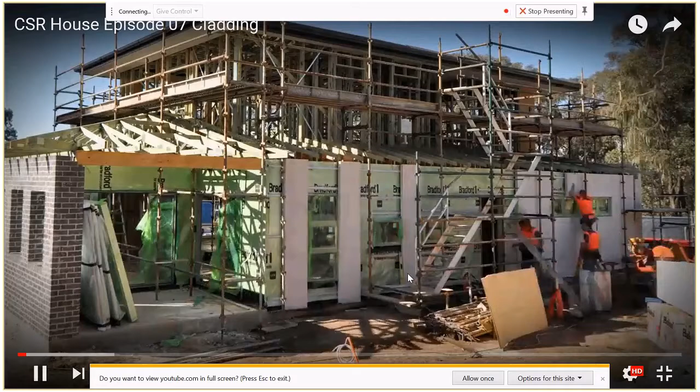One of the aims of the CSR House is to create a sustainable, energy-efficient home that's still going to look modern and attractive. The external cladding is a large part of a house's personality, so it needs to have that contemporary look, but perform thermally as well. We're using a composite of cladding materials to create that distinctive exterior style.

With so many options to choose from, you can go for face brick, rendered masonry walls, fibrous cement panels, weatherboards, or even stone. How do you choose the best material for the location and function of a wall? And why go for a composite look anyway? Here's Gareth to tell us why.

The reason we chose composite materials for the outside of the building was, one, because we wanted to display a variety of the CSR products, but also so that we could experiment with the thermal performance of each of them in various situations on the building.

With the cladding options, CSR has a very wide range of products that can be used for external cladding on houses. Upstairs, we chose the Cemintel Designer Series, and for the cladding on the downstairs area, we chose the Hebel PowerWall. We're aiming for an 8-star energy rating, so it's important to choose products that are high achievers in the efficiency stakes, but also have excellent environmental credentials.

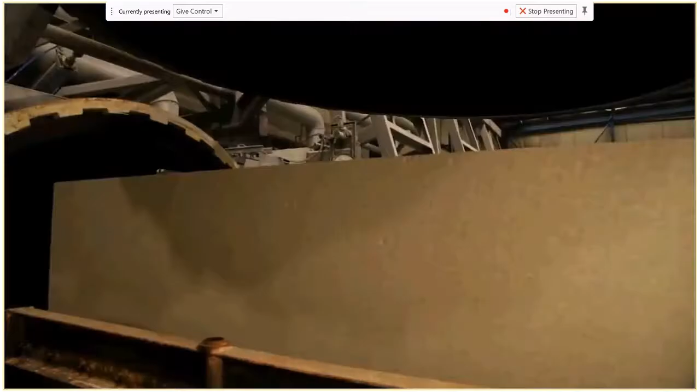Hebel is autoclaved aerated concrete, manufactured from sand, cement, lime, gypsum and aerating agents. Each Hebel PowerPanel is reinforced with specially coated steel mesh, making it incredibly strong and durable. Then it's cut to shape in various lengths and profiles and steam pressure cured in an autoclave. Hebel provides an attractive modern exterior with all the energy performance we need.

Hebel's a fantastic wall cladding system. This is Hebel PowerPanel. These come in 600 wide panels in varying lengths from 2.4 up to 3 metres. They're a 75mm autoclaved concrete. It's very easy to store on site. It comes in a palletised modular form. There's less wastage on site because you can accurately determine how much product you need.

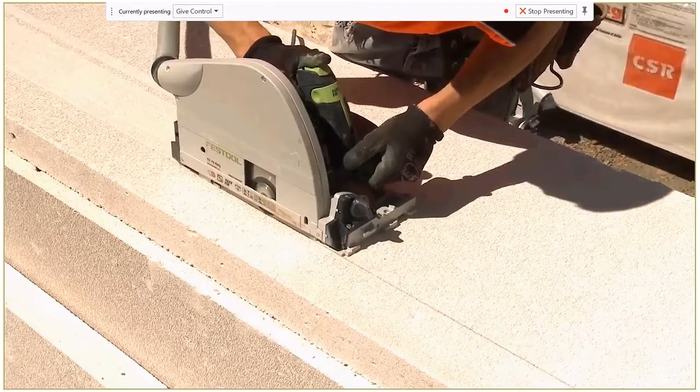You can use conventional power tools, so a circular saw with a power tip blade. Carpenters generally install the product, so it eliminates the need for other trades on site. What we do is spend a bit of effort to make sure that the frame is true and plumb, and then we use a top hat section that we run horizontally across the frame. In our case, we use a 25mm top hat section, but it can go up to a 40mm.

So everybody see that packing out, that top hat as well, so things aren't perfectly plumb, so it's not the best case scenario. A bit more adjustment between the panels.

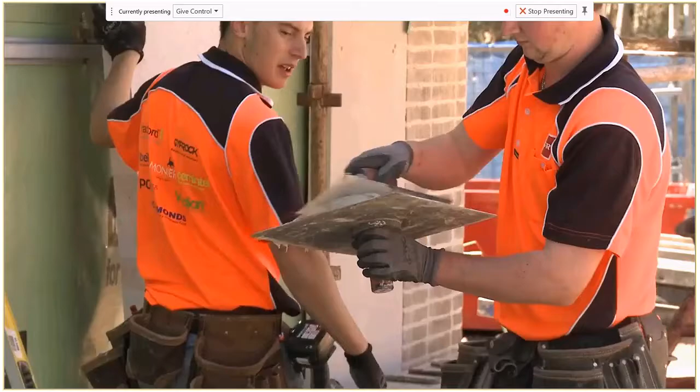The panels are then screw fixed into place, and a proprietary adhesive is applied to the joints, and they're butt jointed together. That adhesive is then scraped off before it dries, and then an acrylic-based render is applied over the top. The render produces a fantastic monolithic rendered finish to the panels, and I've really enjoyed working with it. It's been a great product.

Hebel is non-combustible and it has very high fire resistance properties. It can achieve up to an FRL of 240 minutes, and what that means is it's also a perfect solution for building in bushfire-prone areas. Hebel complies with all 6 bushfire attack level requirements across the country. The Hebel PowerWall has a much better thermal performance than other masonry cladding options.

So everybody understands the bushfire attack levels? So, yeah.

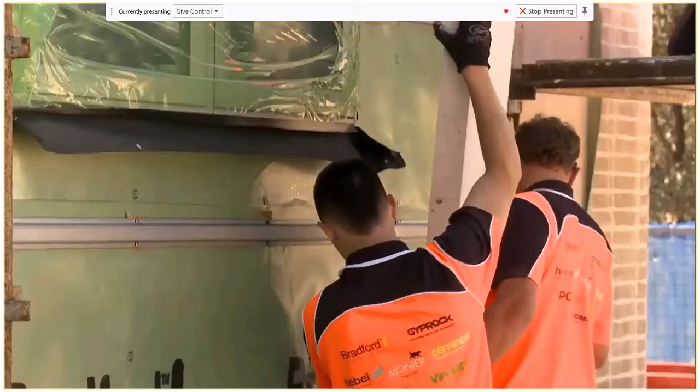You get 0.3 to 0.5 boosts of your R value over equivalent wall systems. It has 61% less embodied energy than concrete and 64% less embodied energy than brick veneer. Hebel is a quarter of the weight of traditional masonry, and our steel reinforced PowerPanels actually pass that critical knock test.

What our consumer research has shown us is that many homeowners these days are highly driven and motivated by design, and that's what attracts them to Hebel, because it allows them to achieve that design freedom and flexibility in their home.

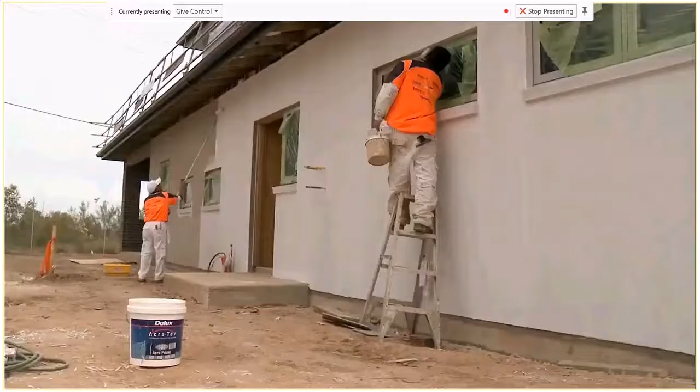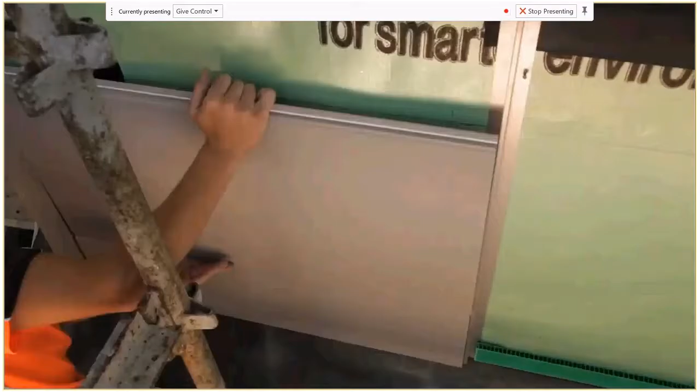Hebel gives a great finish on the lower level, but on the upper level we needed a product that was going to complement the solid contemporary look of Hebel, but be lightweight and durable. Cemintel Designer Series is installed as a complete finished wall system. The panels are tongue and groove profiled along the top and bottom, so they fit neatly together to form a waterproof joint. It also features a ventilated and drained cavity, which is a proven and highly effective method of waterproofing buildings.

The Cemintel Designer Series is a pre-finished walling system that looks great, is quick and easy to install, and has all the reliability you'd expect from a CSR system.

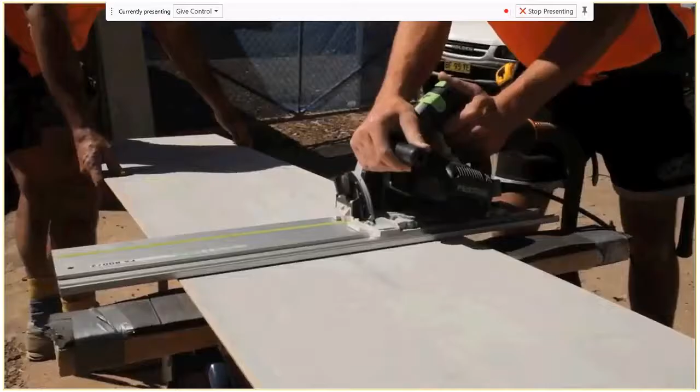The product's actually made of a cement composite material, which is actually lighter and easier to work with than standard cellulose fibre cement. Although it's lighter than standard fibre cement, it has the same properties, so it's termite resistant and won't rot. The Designer Series comes in a range of textures and colours, which makes it great for standalone design or in combination with a number of different facade materials, such as a composite construction, which is the CSR house.

No finishing is required, so essentially all the products have a multi-layer coating, which is designed for long-lasting colour performance. The coating also has an inbuilt property which prevents dust and dirt adhering to the panels, which means that maintenance simply consists of spraying down the wall with a simple garden hose. The Cemintel Designer Series fixing system is totally unique.

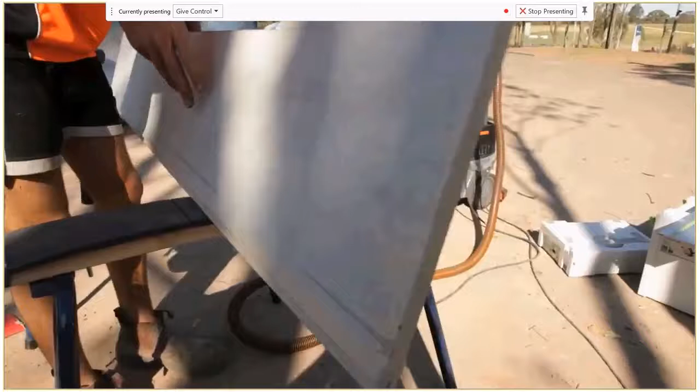Preparation is key to affordability and a successful Designer Series install. Carpenters can do the whole installation from framing and then cladding the wall itself. The boards come in 3030 millimetres in length and 455 is the effective cover. The installation of the board is very easy to achieve. There's a starter strip fixed in the bottom of the frame. You level that off and then the boards are held in place with that.

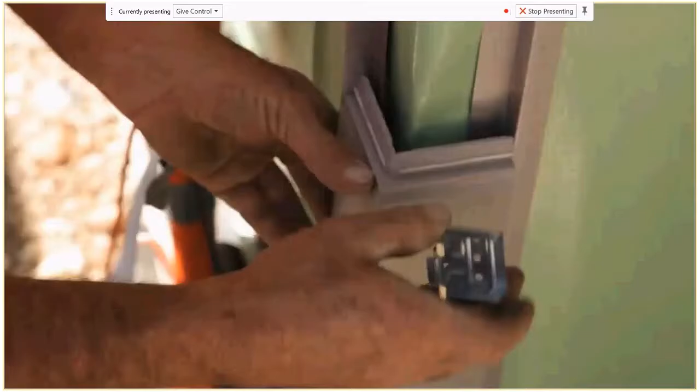The boards have preformed corner pieces which go in and then a sealant joint applied between them or in between boards. And as you can see, that sealant joint works very well. It's very hard to distinguish between that and the board itself. Rather than conventional cladding systems that are fixed direct to the studs, this has got a 15mm cavity which allows for ventilation of the wall system.

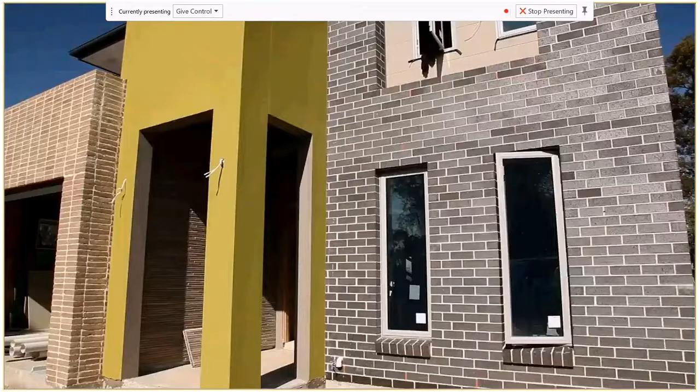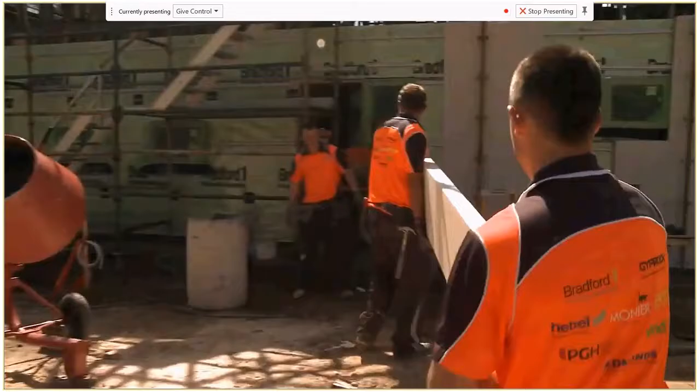Where we're using the Cemintel products, the new display panels, they're being used as feature panels in the lower levels, and it's a very, very attractive finish, looking like a stack stone finish. There is a huge advantage in using the integrated products on a building site. One, because you've got one manufacturer delivering the product, so it's simple. Two, because you've got trades who understand the product and put it together quickly. I mean, the Hebel product we do exclusively on most of our buildings now because we find that the product is so simple and quick to erect.

Can they use that for a wet area directly? You can, but typically, if you're going to do a timber joist system like that with PowerPanel flooring, then you use something like a thick sheet, like the really heavy fibre cement sheets. Has everybody seen those? There's a few different product names for them, and put that down. That gives you a decent sort of step down. If you've got a 75mm panel, then you've got like a 20mm thick sheet going down, so that's a 55mm set down for your bathroom. You can put a screed over top of that and have your drain to your floor trap. So yes, definitely you can use it for wet areas, but there's that benefit of using thick sheet for your wet areas and bringing your joists close together in that wet area.

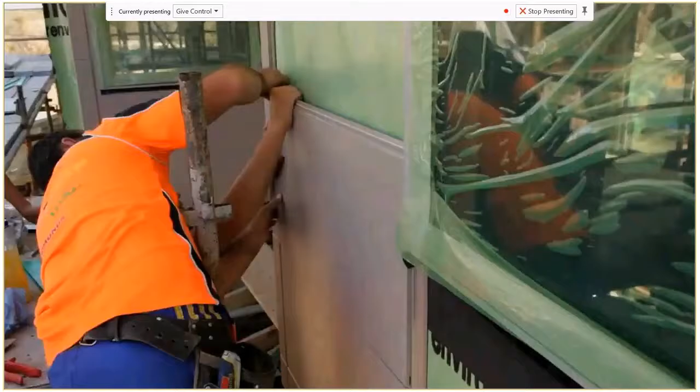On the floor, glue it and squish it together and screw fix it off. And the same thing with the wall panels. When you come to the Cemintel product, it's the same scenario. Again, you're using carpenters to do the work. It's a quick and efficient way of putting a building together, and you get immediate effects. Really, the advantages you get are the guarantees that we provide, because we've done the testing on the connection systems and the jointing systems. So you really do have much more comfort and peace of mind that you're not going to get cracking in the wall elements.

In designing with both Hebel and Cemintel products, from an architectural perspective, we get to expose the sculpture of the building much more. You can already see how the textures are working together, and the advantage of using all CSR products is they integrate perfectly.

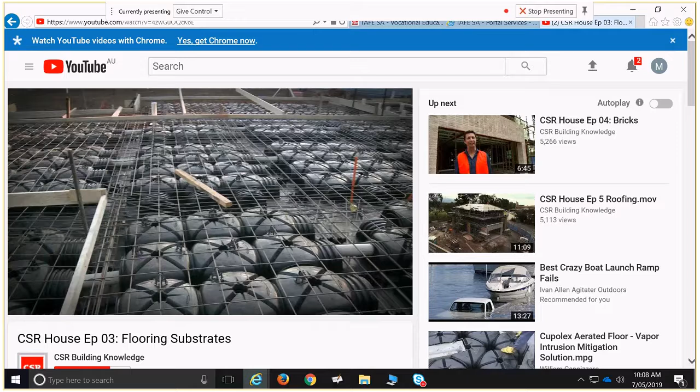The concrete slab that we've used in the CSR house is a variation on the traditional waffle pod slab. Traditional waffle pod slabs use polystyrene void formers. We're using a system called the Cupolex dome system. Cupolex domes are made from recycled plastic, and they're forming the domes or the voids underneath the concrete slab by basically forming volumes and pockets of air rather than being a full solid polystyrene block. Polystyrene is quite nasty on the environment, and the recycled plastic PET that goes into the Cupolex domes is obviously a recycled product, so we have much less impact on the environment.

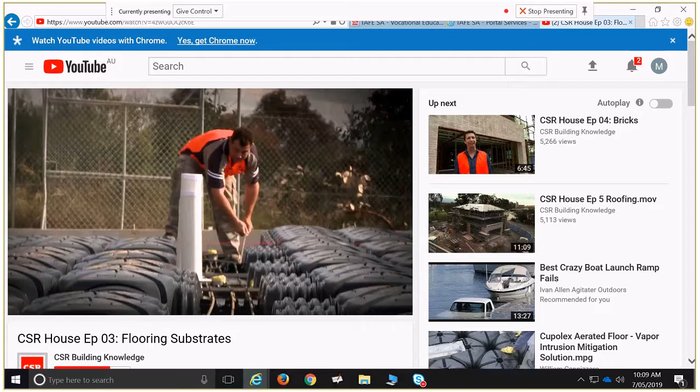We can have a lot of flexibility in how we interlink the domes, whereas the waffle pod systems are purely void formers, and in accordance with the relevant codes, they should only be placed in single units with a concrete beam in between them. With these systems, we can do quite large areas, all interlinked with domes, which we call dome clusters, and we find that's a benefit in costs and speed of construction and ease of construction as well.

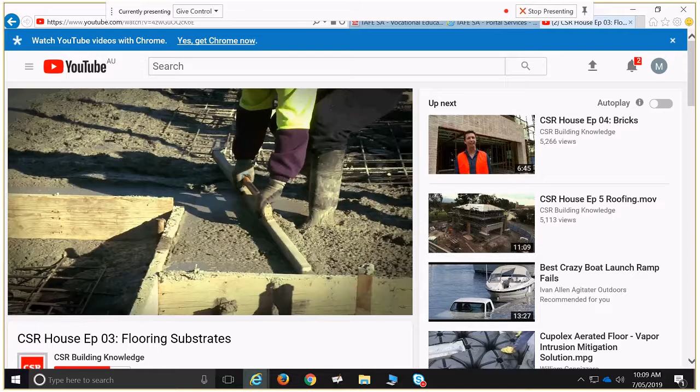The arching effect on the edges of the domes, and also inside the middle of the dome there's the cone shape, which gives them a lot of strength as well. The benefit of that is that every corner of the Cupolex dome bears onto the ground and gives it inherent strength, and it's like a composite plastic concrete structure which you can't get in other forms of construction for slabs.

So with the Cupolex dome system, basically the entire Cupolex pods were delivered on 2 pallets, whereas most traditional waffle pods using polystyrene need 1.5 trailer loads effectively of polystyrene. So you have less transport requirements, less waste on site, and less mess when you're doing the preliminary works for the concrete.

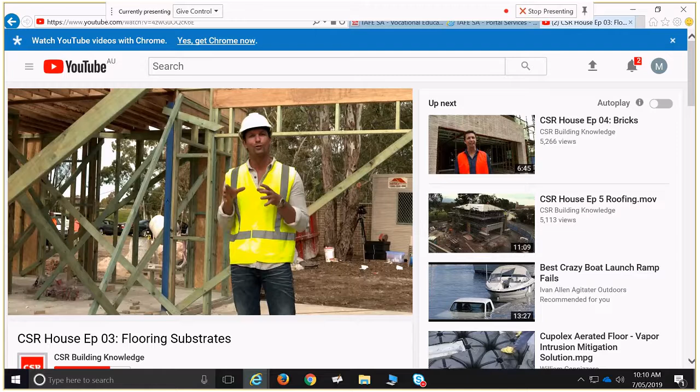For this project, concrete's a great choice. It's durable but quicker, easier and cheaper than a timber frame floor, and has many more thermal benefits. Where timber's a good choice for our sustainable home is in the timber frame. Timber's a renewable resource and has a much lower impact in its production than steel, making it better for your budget and the environment. It's thermally more efficient than steel, so it's going to save you money on your energy bills also. It's no coincidence 90% of residential construction is timber framed.

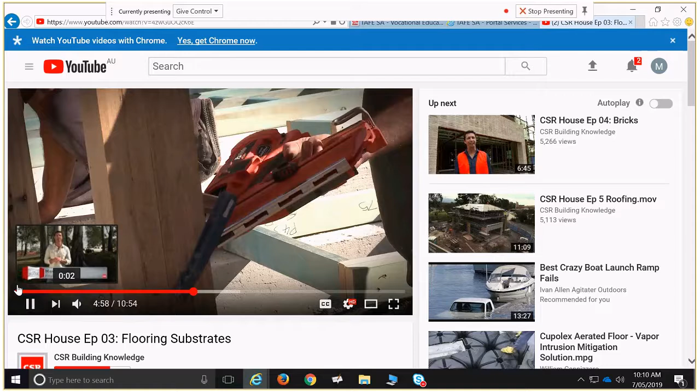Let's stop at that, because that's probably a lot of revision for everybody, and it's not too pertinent to what we're covering today. I just thought, because that Cupolex bit was coupled with this other Hebel video, I saw that the other night. But I'll show that in here as well, because it's another approach to a footing system, which is really innovative. So you have good solid slab on our ground floor, but if you want to keep costs down.

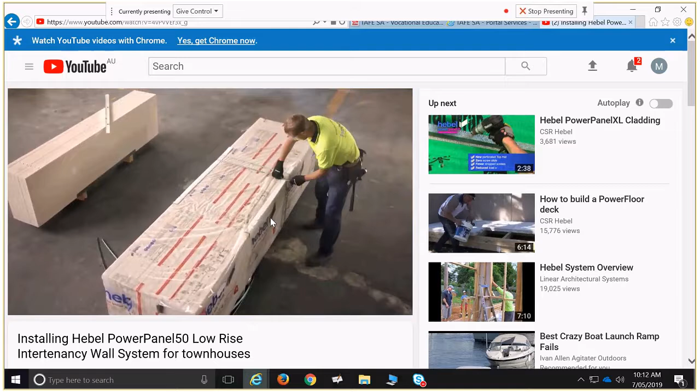We'll see this one as well, because this is about another application of the Hebel power panel. It's for intertenancy walls, because of its fire rating capabilities and its ability to be installed in a fashion which is independent of the support structure, and we'll see those details in a minute, makes it a really good intertenancy wall.

So in the first video, we see that they are making a steel mesh. By making the Hebel panel, they first created a big steel mesh, and then they filled it with the material, and then the slabs are very thin pieces, cut long and thin. So they have a little bit of that mesh in them. So does that mesh still work after cutting? Initially it was in the form of a net, and that's when it was giving strength, I think. And now the Hebel panels are cut in very small pieces.

Yeah. So what happens is all that mesh goes into the, I don't know what you call it, bath or form. So they've got a great big tub with all the Hebel cement slurry in there that's expanding up. All that mesh goes in there vertically. So it is cut vertically? Yeah, and then they pull out the big block and they cut them all vertically, like that. So the whole mesh is still inside it. But what you get happening on site, you get 3 metre long sections. You don't always want to use 3 metre long sections.

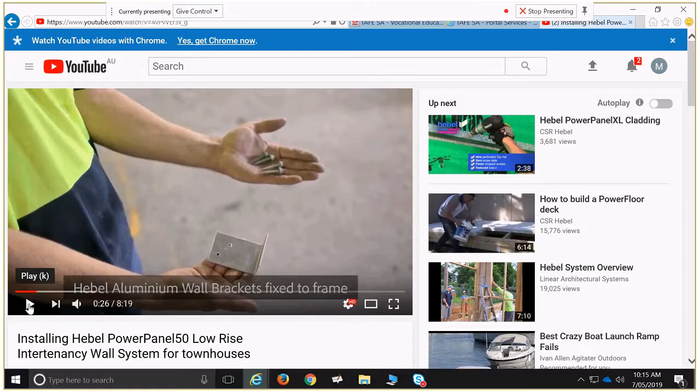Actually, I'll leave this one to roll, and I'll duck over to the storeroom and get a piece of Hebel. So while this is happening.

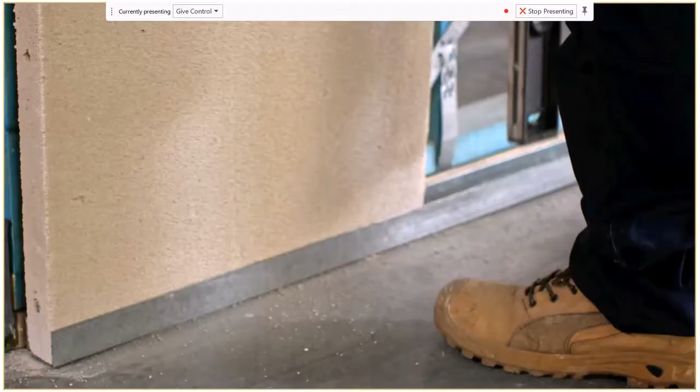They install this steel rail and they apply the gel kind of thing on the joint. Why do they do it just on the joint? It's that fire protection seal. Oh yes. So they'll have a joint between their Hebel panels, but to ensure... Not the panels, the rails. When they're going down, it's like a U channel at the bottom. They only put the sealant where they were butt joining together the U channel.

Okay, yeah. So that's because you get just a slight crack in there, and with the fire resistance levels that you see expressed in the National Construction Code, you've got structural adequacy, integrity, and insulation. That adequacy means that structure has to stand up for a given time. So it has to maintain itself as a structure.

The integrity means that no flames or gases can pass through that wall for that specified amount of time. Now flames, that's kind of easy to stop. Gases, it's not so easy to stop. You can have tiny little holes. When a building burns, you look at this building and think, okay, there'd be some pretty noxious gases coming off of this carpet and that polyfelt wall. You're not allowed to have any of those gases pass into another unit. So that means you've got to seal every single gap.

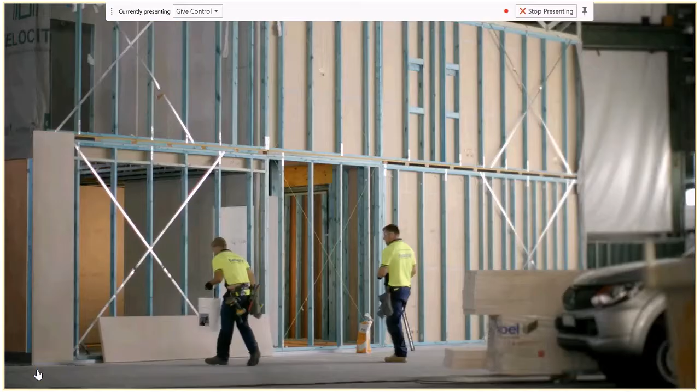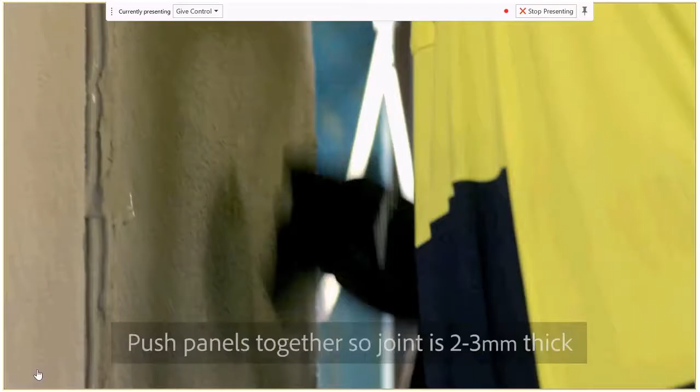That's one of the benefits that Hebel's got above things like blue board. Blue board is another substrate for render. With Hebel, because you've got thickness to the panel, you can have the adhesive on the end, and it means those panels end up working together, so when you've got movement in a frame, it's less likely to be expressed straight through those vertical joints.

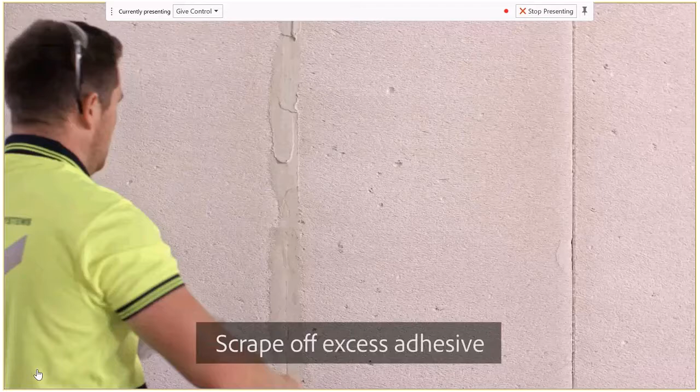So also with any solid type walling system, well actually even plasterboard, when you're doing really long runs, you need to have control joints in them. And you also have control joints throughout a building. Say for example you've got a building like this, where predominantly the structure is large steel portal frames. They're large frames of big sections bolted together. Those portal frames basically provide the shell for this whole building. They work independently of the floor slab here.

And so you'll notice around some of the portal frame stations, they'll have these diamond-shaped cuts, and those diamond-shaped cuts will line up with cuts in the floor slab. They're all control joints to enable those slabs to move a little bit, because everything in Adelaide does a little bit of this, with the reactive soils.

But if you've got a plasterboard wall, for example, or any form of wall going across that, and you've got a control joint in that floor, then you have to carry that control joint straight up vertically through every other element that's being built above. Because if you don't, and you do your plasterboard clad wall straight on top of that, it's going to crack directly above that control joint.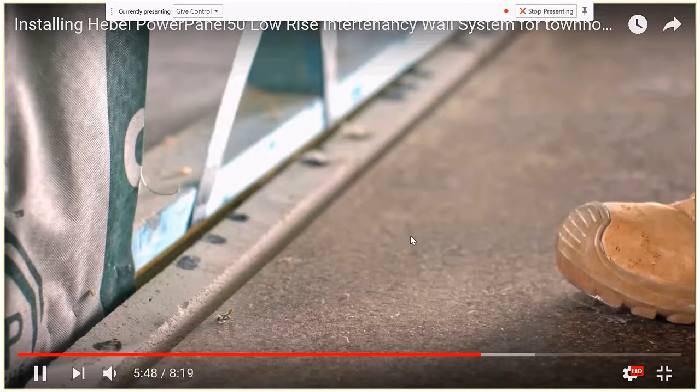Another thing that's used for sealing a lot of gaps for both bushfire prone areas and also in intertenancy walls is mineral fibre insulation as well. So it's one of those things which you can't burn, but it's compressible and will expand and spring back to help fill voids.

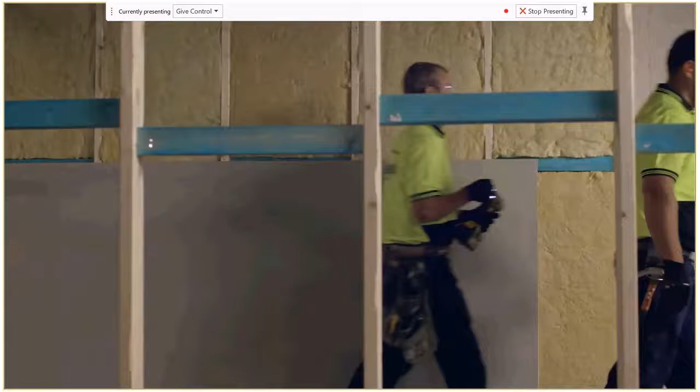So yeah, design installation guide, that's what we'll have a quick look at now. And also, two options for today's class. Yeah, it's still not raining yet. So we've got the option of we take a walk down to have a look at the buildings that are being built down here, where they're getting some Hebel in, and there's some other interesting stuff like with the OSB sheeting and so on for bracing that we could show you. So that's one option. Or the other option is we go through the services slides extensively.

If we don't go through services extensively today, we've made a bit of a mention of air conditioning, and it's about you guys looking at the stuff yourself this week and also researching air conditioning yourself, or vice versa. Or we go have a look at installation stuff. Do we have any preferences for one or the other? So I'll lump that decision on you. We can do a silent vote. I can pass around a piece of paper.

Well, we're not allowed to go into the site though. We'll just be standing. No. So just walk around the street. I don't know, I feel like the videos we've seen showed pretty detailed how it's installed, how it looks, and all that. Fair enough. Yeah. Cool. Do we have any detractors? And don't want to get caught in the rain out there. Yeah, it's meant to come in around 10 o'clock today, so 10:30. All right.

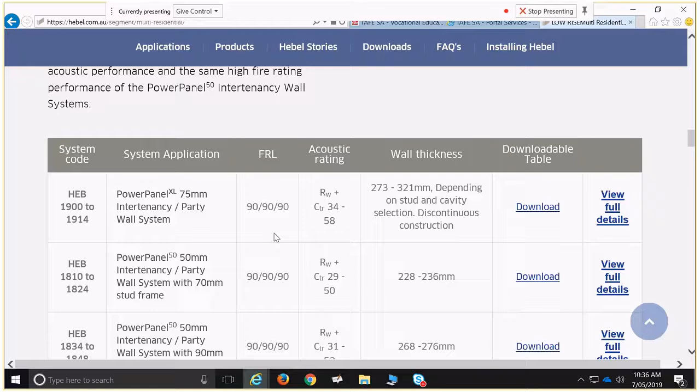One of the things you'll see in the design guides, I have to find out exactly where they are located again, but one of the things you'll see in them is you've got these system codes. So they've got a product, and they've got a whole bunch of other products, their top hat sections and all this sort of stuff. And they say, okay, with this system, you can achieve this particular thing. So let's say with HEB 1900 to 1914, you get a fire resistance level of 90/90/90. That's an hour and a half of adequacy, integrity, and insulation.

You'll get a sound transmission rating of between 34 and 58. For separate occupancy units in a class 3 building, you have to have a sound transmission rating of at least 50. So with one of those systems there, you've got to be able to use that in a class 3 building, and then information about wall thicknesses. So some downloads there for the various different systems, and I'll have to find these installation guides, maybe it's in products.

Okay, yeah, so design installation. So you've got all of your installation guides here for flooring, for walling, for all your multi-residential applications. We'll have a quick look at external walls, or intertenancy. Go to the next one, it's Hebel PowerFence. Okay, we'll have a look at this one then, that'll include some flooring. So low-rise, multi-residential and commercial 75mm PowerFloor. So all their panels, they call them PowerPanels.

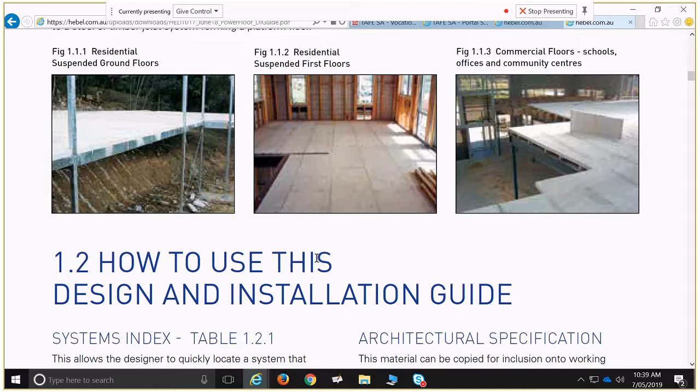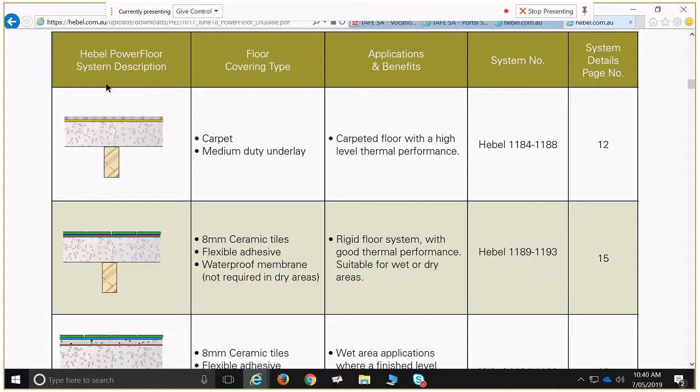So in here, you've got a bit more information about different installation systems. So we've got one for carpet, one for 8mm ceramic tiles, and then we've got these system numbers associated with them, and then page numbers for your details. So if we go to Hebel Power Floor System number 1184, go to page 12 for our details. Just like that. We go to page 4.

So there you have some installation details showing you've got floor joists running perpendicular to your joins in the panels. You run a bead of construction adhesive. Then you set down your first panel and screw fix it into place. Flush those screw fixings with the panel adhesive. Put some panel adhesive on the ends. Drop your next panel in. Squash that into the key joint, etc. And then underlay, carpet, etc.

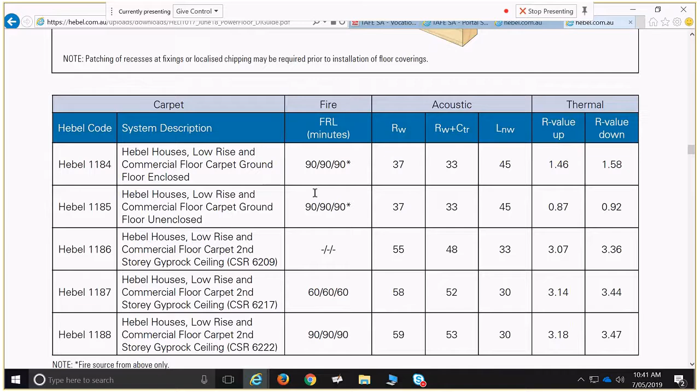And then in that range, there's your various different details and your sound ratings. So the first one that's going to meet those sound ratings for your Class 3 building is going to be that one. So we've got commercial floor carpet, second story gyprock ceiling. So you've got a gyprock ceiling underneath that.

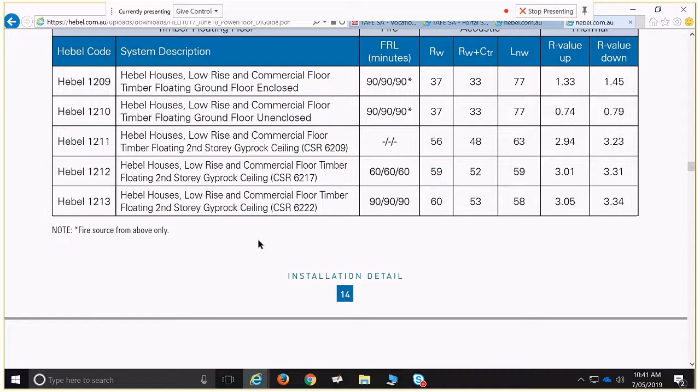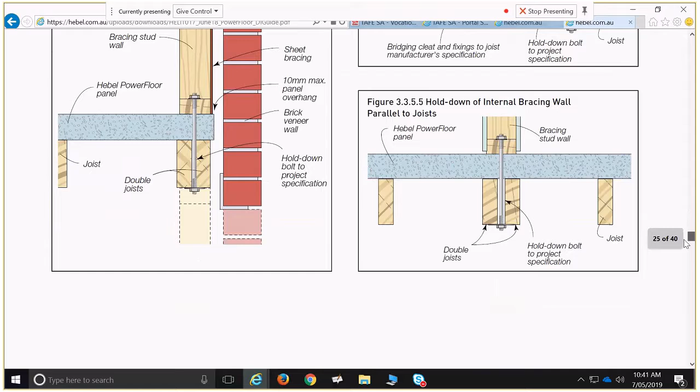Anyhow, work your way through these. Get to know your way around the design guides a bit, so you know that there are various different systems for various different uses and applications, and that all of those installation details for all the different approaches are there. So that's just flooring, but you've got walling systems, walling details, details for penetrations through flooring. Basically, pretty much every sort of detail you're typically going to require in the construction of a fairly straightforward multi-residential property, those details are in here somewhere. So have a good look through that.

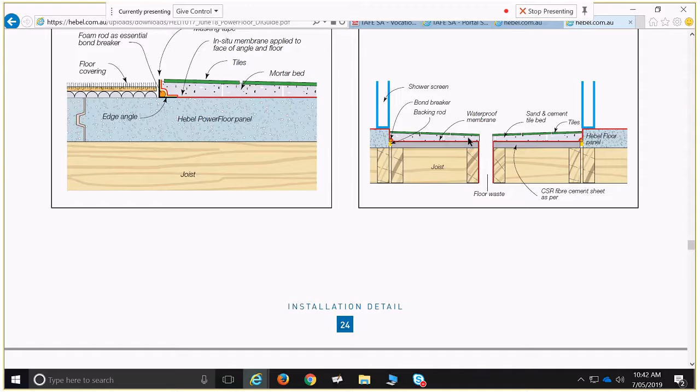Darcy asked early on, do you use it for wet areas? And I said typically you use a thin sheet. That's that detail there. So for the Hebel floor, you use a thin sheet that can create that set down, and then you put your screed on top of that. Because if it was like a chipboard, what do you call a floor like that? The framed structure floor. With a structure floor the frame actually has to be set down, but because Hebel is so thick, they're using a thinner material for the wet area. It doesn't actually.

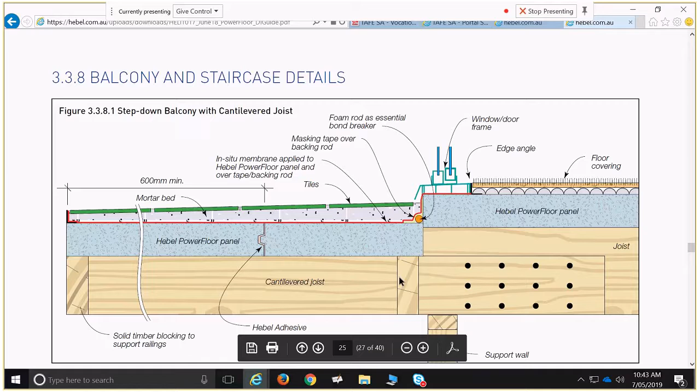There's also the option of creating set downs in your framing. Now, set downs in your framing, that's far more involved. There's a lot more work in that. Also, where you're going to do a set down in your framing, you're going to have changes with your joists anyhow. So you want a supporting wall. It's much simpler to do the set down with that thin sheet because, yes, your joist spacing will probably be reduced to 300 millimetres instead of 450 or 600 or 900, whatever it is for the thickness of your panel. But if you've got a supporting wall at that point, then reducing joist spacing is a very simple thing to do.

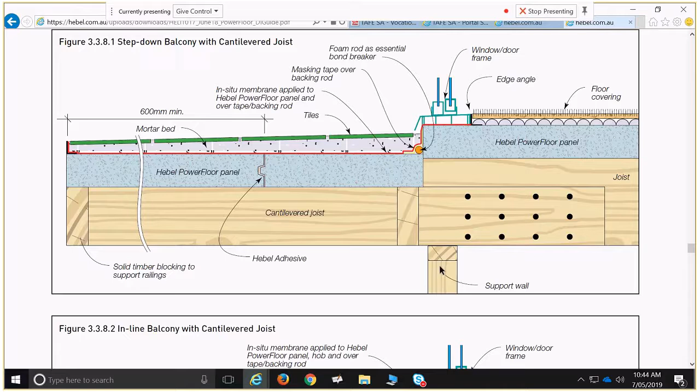But yeah, there are details for whatever approach suits you. And the reason people will use different approaches is because there are certain other design elements in the house which will flow on to reasons why you go with this way of doing it rather than another way of doing it. And that's all case specific, and that's where you get that enabling of, okay, we want to produce this feature, we want to produce that feature, we want to have this layout, etc. That's the design flexibility we've got.

But also another reason you do it is because of your brick wall down the bottom here. If kids are running into that with their bikes or you're banging it with your car, to an extent it's relatively durable against these sort of knocks, etc. Your weatherboard cladding is not so durable against things like that, but your weatherboard is really light.

Typically, when you go up, and has everybody seen a pop top extension, or you know what that is? So with your older 1950s, 1960s houses, there was a bit of a thing, you don't really see it much anymore, where you've got your old single-story house and people go, well, we don't want to move out, we want to make our house bigger, we want an extension, we don't want to go in the backyard, let's take the roof off and we'll build a bit on the top. So you see that around a bit.

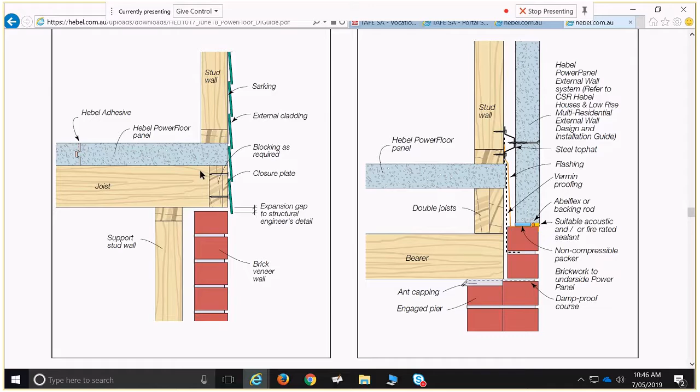Typically you'll do that with weatherboard because weatherboard cladding is quite light and you don't want to be transferring a lot of additional loads onto your house that it wasn't initially designed for. That's also the same reason why you use weatherboard for an upstairs, because overall the system is really quite light. You're not transferring a whole lot of extra load onto your frame beneath. If you were going to go with a heavier cladding, like a Hebel or something like that, then you will be transferring more load. And Hebel will provide you that strength, that knock resistance, but you don't really need it on other floors.

Details relating to treatment of moisture. So you're always going to have a little bit of moisture making its way into cavity walls. That's what cavity walls are designed for, be that moisture coming in through small gaps or condensation. That's another important detail to show. Once again, we've got a control joint happening here because we've got a joint happening in joists. Certainly the best thing is to lap your joists to a decent amount and nail through, so they're not going to be doing that.

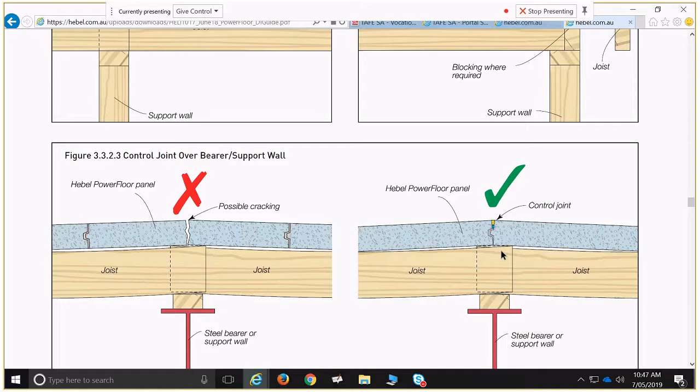But if you've got flexibility happening in your house, that is going to be expressed where you've got joints happening in the flooring structure. And also the other best practice thing to do is not have joints in joists all the way along; you stagger all your joints through. But where you've got a supporting bearer or a supporting wall like that, and then you've got a series of joists joining, then you do a control joint above that, so it has that flexibility rather than go cracking through any of your Hebel floor.

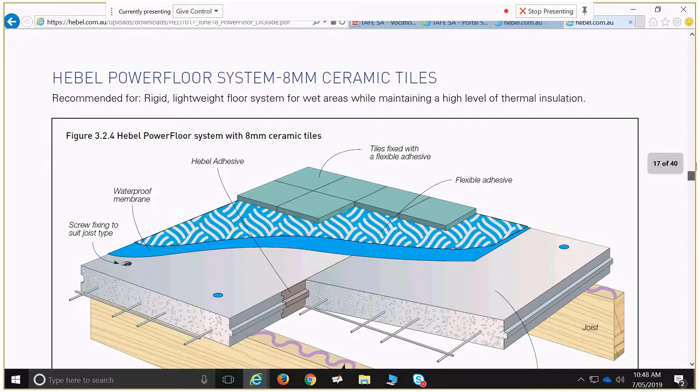Other control joint details, etc. Here, details for joining to different framing types. I think we've got details where you've got change in joist direction as well. That must be further down. Anyhow, so stacks of details for doing a bunch of things. And you've got a bit of the marketing material which is going to plug it as a product a lot. Working through this and getting to understand the installation and the capacity and so on is going to give you a bit more of an idea of its benefits and its shortcomings.

Primarily though, the major shortcoming of it is it's more expensive. So to do a timber joist floor with structural flooring on top is going to be several thousand dollars cheaper than doing a timber frame floor with Hebel on the top. That's the main driver as to why somebody would choose not to use it. Can anybody think of any of the benefits of it? I'll make it simple by going to a section here with a bunch of things on it, because obviously their design guides are going to tell you about benefits, not the shortcomings.

It's relatively strong. What's that? Easy to install. Easy to install, yeah. So they're quite quick and easy to install. So is particle board flooring. That's also very easy to install. In fact, I'd say that's even easier, being quicker. But still, it's quite easy to install, much simpler than floorboards.

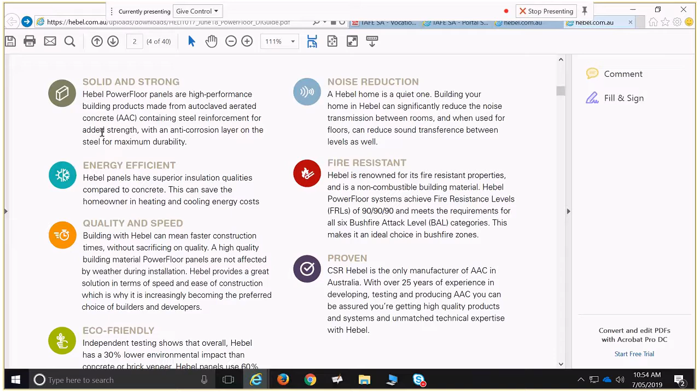So work your way through those, and of course, yeah, like with everything, grab all those design guides and keep them in your filing system. Have that filing system where you bring all this stuff in, so you can be referring to it at any point in time.

Might be quicker to open up a new one.

So there's a bunch of other slides. So we'll be looking more at concrete. I've decided not to go through this stuff just yet. We'll look at that in the commercial construction because this assignment is due fairly soon. So we'll have a look more at steel for hot rolled sections, major use of steel, later on. We may get a good look at cross-laminated timber as well.

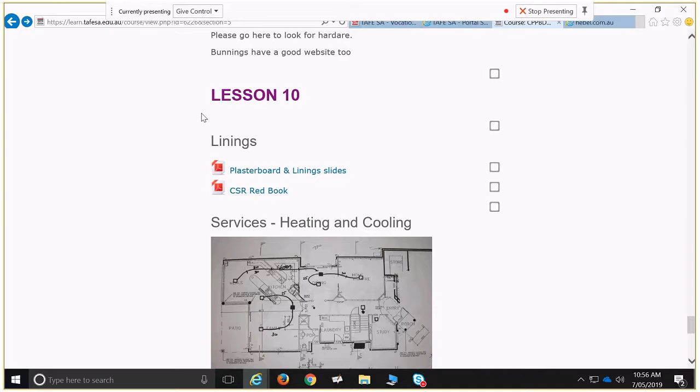I mentioned earlier the CSR Red Book about shaft liner intertenancy walls. Stacks of really good stuff in that, but if you print it out, it's this thick. It is a bit overwhelming. Have a look at it if you wish.

What we're going to have a look at now are services. So, yes, as drafters, as building designers, we should not be telling electricians how to do their job. We should not be telling plumbers how to do their job. It's for them to say how they should do their job. But it's still important for us to understand their jobs.

What Thomas referred to earlier on is things have to be buildable. You don't want to go saying, oh, let's do this and do this and do this, not think about something, and then find out that you can't get stuff, like pipes can't go in there, things can't work. And it happens all too often where you get plumbers that cut floor joists, and they just chop a bit out of the floor joist and put a pipe through, and then that's their job done, and they walk away. You don't want that sort of thing happening. So it's important for us to understand the services.

I'll go through these, try to go through these relatively quickly. I wonder if there's a better way.

I was actually doing some work setting up the Garden of Unearthly Delights. Oh yeah, yeah. The food stalls are built from all the recycled timber. And the carpenters can't build it all, and then when people come to do the fixtures, people were cutting strapping, and just cutting whatever they had to fit everything in. It was so funny to see. Not that much thought goes into it, but it's just funny how the carpenters can't do their thing. Yeah. And then it all just gets undone.

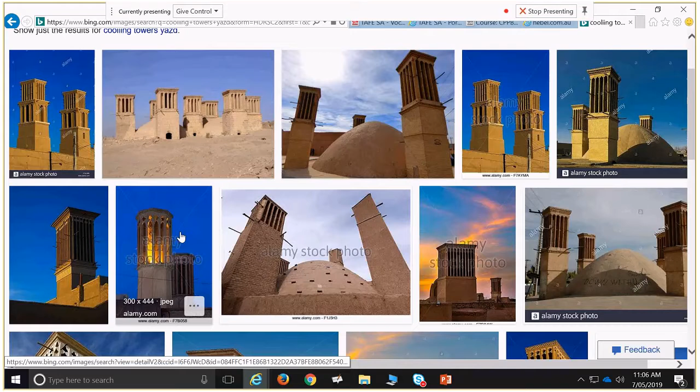Have I showed you the buildings in Iran? No? Don't think so? Right. Well, let's digress just slightly because this is pre-electric air conditioning. So the city of Yazd in Iran is known for it. It's a desert city, but it's not just in Yazd, it's in a whole bunch of places. I haven't travelled in India, Pakistan, or Central Asia, so I don't know if these are features anywhere else in the world, or whether it's more of a Middle Eastern thing, but I certainly saw it used a lot in the desert cities of Iran, where you have towers like this. I'll see if there's a building cross section to show. Yeah, there we go.

We've got this building cross section. So you have that tower coming up there, and on the windward side, wind can go into that tower and it's directed down, into a cellar under the house, or sometimes even a big water tank. So they'll build stone walls there and seal that, and collect all their water under the house, and then that air is directed down into those cool rooms or the water storage, and then comes back up through floor grates, so that evaporative air conditioning comes through the floor.

And from the top of the room, where all the hot air rises, that's connected with the leeward side of the tower, which via a Venturi action, as you get wind passing that wind tower, creates a suction on the leeward side. So all you need is a very slight breeze, and you get free air conditioning. And we're talking about very, very slight breezes. I was in a room, it was stinking hot, very indiscernible breeze. I had a nap on top of one of those floor grates because you just got all that cool air sucking through there.

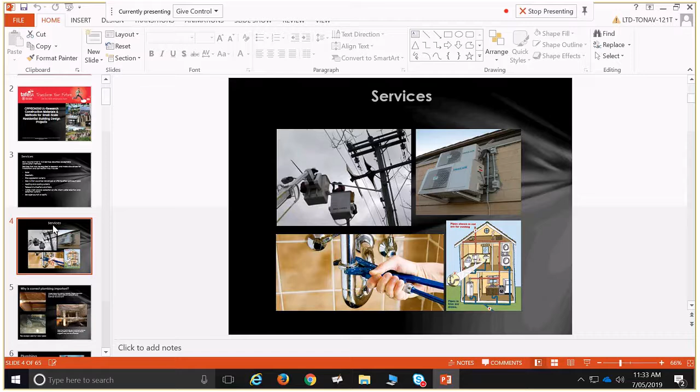I think we've pretty much covered everything there. I'll go through these bits fairly quickly. A big part of damage to houses actually happens from plumbing. So we've got movable soils, we've got pipes that go through things, they get cracked, they leak, they soak into the soil, they make the cracks worse. And there are massive health ramifications for people who live in buildings with mould, etc. So there's carcinogenic links and all that sort of thing, but also gut health and all sorts of things. So that's why we have SA Health on-site wastewater guidelines, etc.

So with your plumbing, it's important that it's serviceable, that when you've got pipes travelling horizontally through slab beams, they're lagged to enable that movement. Lagging of pipes is incredibly important, and also that the pipes aren't damaged through the process of laying the concrete, which happens sometimes as well, so it's good to monitor that.

Plumbing, you've got AS 3500, got .1, .2, .3, etc. I can't remember which is which. I think .3 is for roof plumbing and stormwater. Anyhow, you have a specific section of AS 3500 that is for wastewater plumbing. Within that, let's call it AS 3500.3, toward the end, you have a whole lot of indicative installation diagrams that show your common pipe sizes.

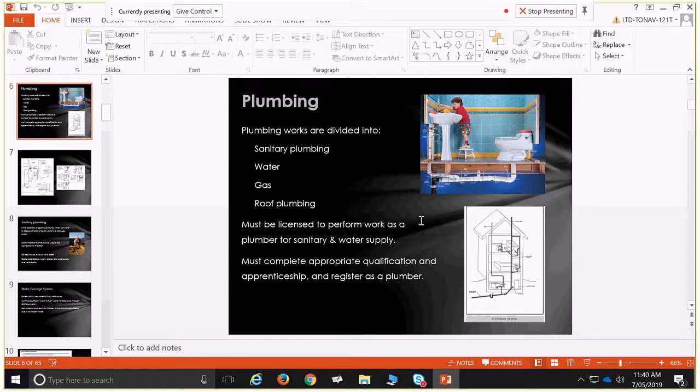So at any point in time, if there's a question of, did you have a licensed plumber do this work? You can say, yes, I've got an address of the property. Let's find out what that ECOC is. Yes, it was this person at this date that did this work that said it was okay. So all that's kept electronically. Now, it's much better than the previous system where it was paper, plumber keeps one, you keep one, you have a house fire or something like that. It's gone, plumber's gone out of business.

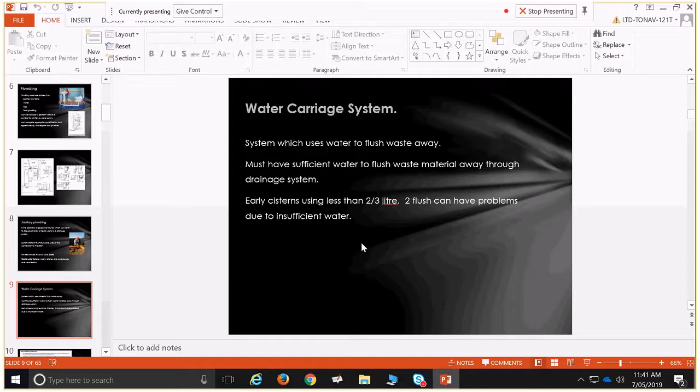So sanitary plumbing gets all your waste away from the building. Designed in accordance with AS 3500. So carried by water, so a water carriage system.

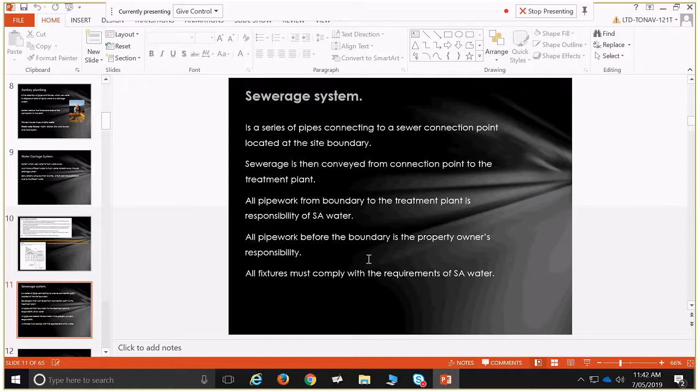But that overflow relief gully, that's just in case there's a blockage further down and you flush the toilet or so, so that all that waste pops up outside the house, out in the garden, rather than inside the house. So it's that safety measure. You don't want all that stuff coming up through the floor trap of your bathroom or something. So that's the septic sand filtration system.

Great idea. My neighbours have got one. I wish I had one, but they're not available anymore. But hopefully, maybe available again.

Common effluent. So common effluent is where you've got properties that come together. Now that common effluent might be government owned. Until recently, Yankalilla Council owned the common effluent system for the Wirrina Cove development. So does anybody know the Wirrina Cove development? So golf course and houses and things there. They've got a common effluent system for all those properties. Until recently, that was owned by Yankalilla Council. They just sold that to SA Water. So now it's come under the banner of SA Water.

By and large, the majority of all your sewage is taken care of by SA Water, and that's all paid for by your water rates, and they charge you. So if you're on that system, that's what they charge you. But there are some council-owned systems like that one down there, or some privately owned systems where you've got places, maybe you've seen it on the river. You mentioned having been involved with the river, or living on the river previously.

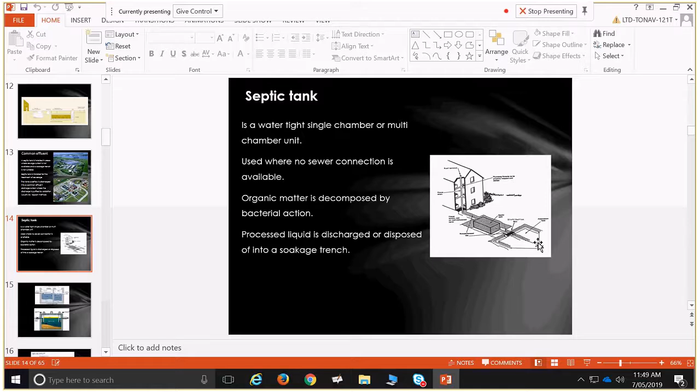With your septic tanks, you still need to get them pumped every now and again. And it's not because they get too full, that can happen, but the main thing is you get solids that the microbes don't break down. So minerals, all this sort of stuff ends up collecting in there. The microbes can't break it down. It doesn't get carried through and soak in the soil. So you have to get them pumped every now and again when they start being ineffective. So that's a cross section of your typical septic tank. So it's this sludge that gets pumped out, however often, depending on the usage.

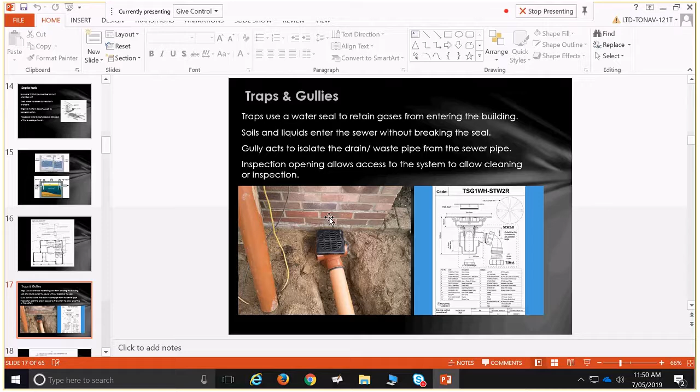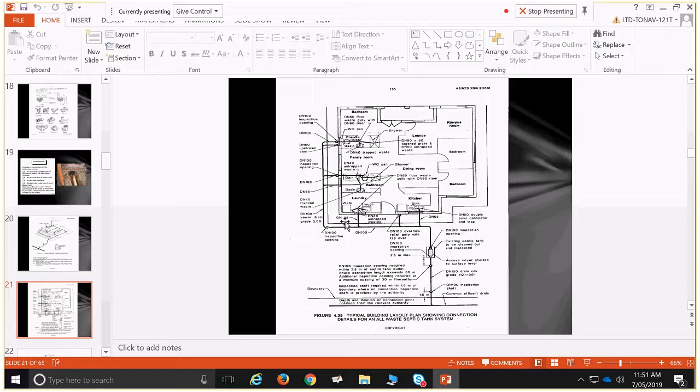This one's also taken directly from AS 3500, so that shows you your typical plumbing runs, and it's giving some suggested pipe sizes here. So we've got a 100 mil pipe, then we've got a 65 mil pipe that's picking up the shower and hand basin, etc. So you can get an idea of what your pipe sizes are, and then also there's information in there about what your falls are going to be for various different situations. Right, so that's our plumbing. I'll move through fairly quickly.

Electrical. So SA Power Networks are the authority that regulate your domestic electricity. In South Australia we've got SA Power Networks and ElectraNet. ElectraNet do all the really big stuff, all your high tension, those big triangular shaped power lines. That's ElectraNet. They own all the major infrastructure. SA Power Networks own all the small infrastructure, all your 415 and 240 volt stuff.

So whenever you get a connection happening to your house, you've got to be dealing with SA Power Networks to get that connection to happen. Now, you might have very little involvement in the process. You choose an electrician and you choose an energy provider. You phone up the energy provider, or you fill out the form, send it through to them and say, I want power at this place. This is the address. This is the electrician that we're using. I want 240 volt power, this many amps, etc. Maybe you can get the electrician to fill that out for you. Send them off to your provider.

They will manage the process because they will then also put their meter into your meter box. If I was to go with Origin Energy, for example, Origin Energy put their meter in the box, and then I'll have a contract with them. Now, it might not cost me much to get a new energy provider to change over and put their meter in the box, but there is a bit of a changeover, a bit of an impediment. They're happy to manage that process for you. So that's typically how it's done. You choose a retailer, and the retailer can handle that process for you in conjunction with your electrician. And your electrician will be in contact with SA Power Networks.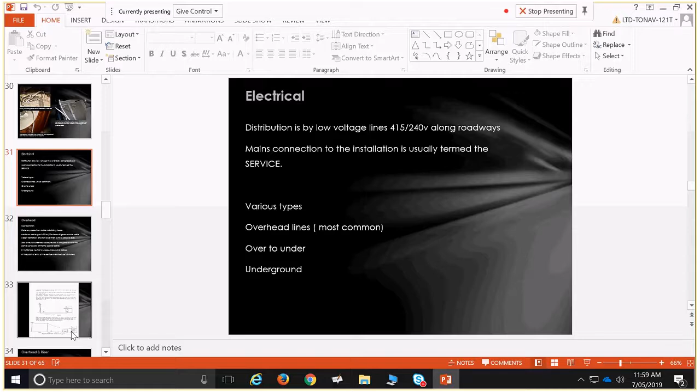They may say, no, you have to have your meter box here because we don't want our meters travelling that distance. Even though we're going to a system of smart meters now, when you put a meter in, the mainstay is you have to put a smart meter in. A smart meter can read your meter and send that information off through Wi-Fi, so nobody needs to read it. Anyhow, SA Power Networks is still saying you've got to have your meter box here. And if you've got to have your meter box there, that means you have to run power.

So I won't go through all this. Much of that is fairly obsolete, and you won't need to know it anyhow. There's terms like over to under, etc. You can get power from a stobie pole that goes underground, over to under. At the stobie pole, for a lot of older installations, you have a service fuse. At the point of the service fuse, everything before that, SA Power Networks owns. Everything after that, you own. So if you chop it with your garden spade, you have to fix it, not SA Power Networks. We have to pay for it to be fixed.

But if a tree falls on it and takes out the stobie pole before the service fuse, then SA Power Networks have to pay for it. From that service fuse onwards, it's called the consumer mains. So it's mains power, but it's the consumer mains. There are different considerations when you're building in proximity to power lines. If it's SA Power Networks infrastructure, there are certain rules you have to abide by. If it's consumer mains, there's less control over that. Obviously, you don't want to go digging holes and breaking power cables, but

different responsibilities. Sometimes you've got the service fuse on the stobie pole, sometimes it's actually in the meter box in the house. SA Power Networks own that infrastructure to that service fuse, so to where the service fuse is.

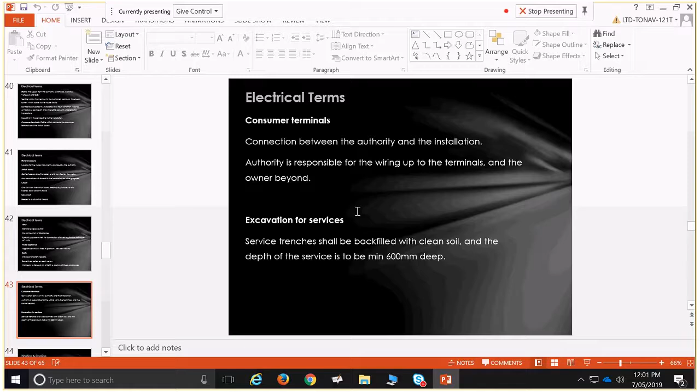So we're pretty much done for the day. I can't hang around for much longer. Next week I'll touch briefly on our air conditioning system. We've pushed that assignment due date back to the 17th, so it gives you an extra week. You can probably do it all without the introduction and discussion on those air conditioning types, and a lot of that information you can get from the internet anyhow. But we'll have that discussion next week, so I won't hold you up further. Unless there are any questions.